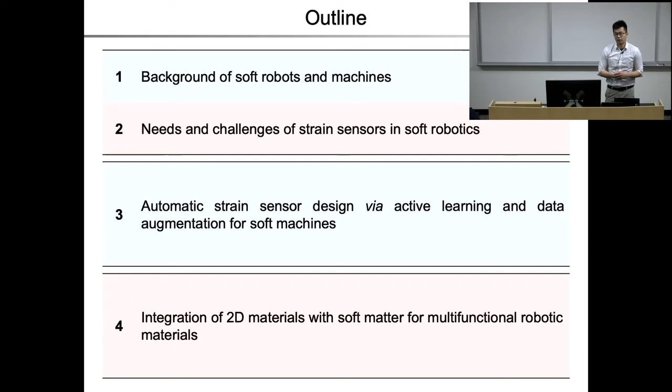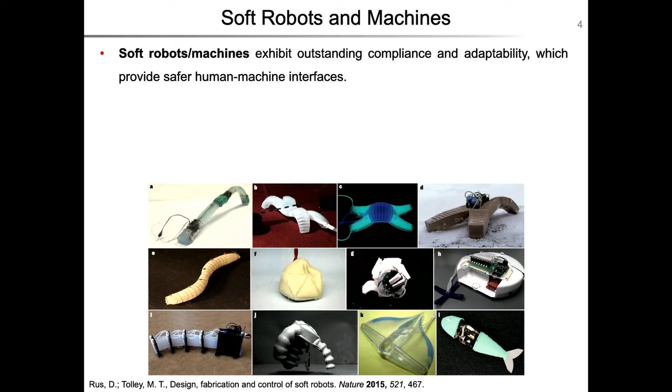All right, so first of all, let's do the background of the soft robot and soft machine introductions. So soft robot and soft machine, as you can see in the figure over here, they are fabricated by using soft matters. So unlike the traditional robot, which has a rigid body or rigid links, they are using elastomers, like silicone elastomer, or some people use hydrogel or polymer or paper, to create these origami structures or these soft, octopus-like soft robots.

Okay, and then because the material they are using is intrinsically soft, they have outstanding compliance and adaptability. So when you control these soft robots, theoretically they have infinite degrees of freedom of deformation. So they give us a lot of advantage compared with conventional rigid robots. And because they are using this kind of soft matter as their body, the soft robot features lightweight and lower fabrication cost.

Also, because of the lightweight, you can use less power to drive this robot to actuate and do the task, so it's relatively power efficient. And those materials are easy to get access to. Even a high school student in my lab can fabricate a soft robot and soft machines.

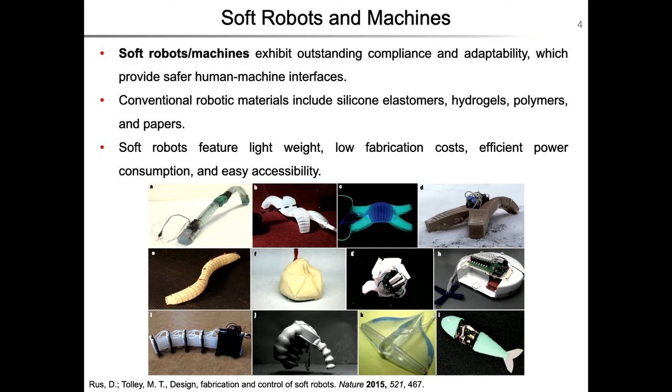One of the focus areas in the soft robotic field right now is to give the soft robot environmental perception or self perception. The way people normally do this is to embed sensors into or onto the soft robotic bodies. As you can see, there are several examples here, trying to embed sensors to help the robot understand itself, understand the environment, and understand the objects it's dealing with.

For example, if we embed strain sensors into the soft robot, the strain sensor can provide kinematic estimations indicating the deformation degree of the robot itself, helping us achieve feedback control. Once you know how much they deform, you can control, for example, your pressure or engine power to drive your robot to a certain location with high precision. That's a strain sensor — it gives you kinematic perceptions.

Pressure sensors give us information about contact with objects. For example, if the robot is grabbing something heavy or light, like a ball, a pressure sensor lets you tell the surface texture, weight, roughness, and hardness of the object the soft robot is dealing with.

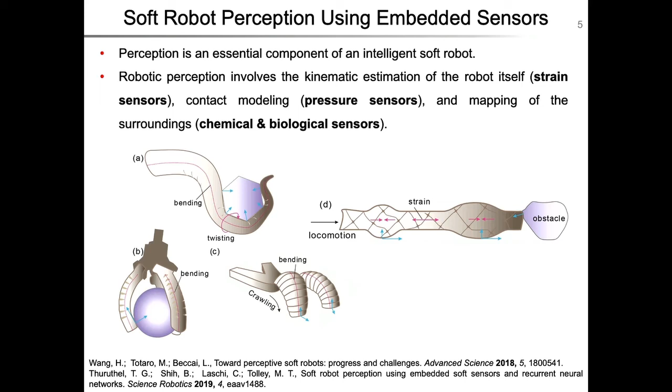The last category is chemical and biological sensors. They can be embedded or placed onto soft robots to help the robot understand the environment and the situation, helping them decide their next movements. My lab focuses a lot on making these kinds of sensors for soft robots, ranging from strain sensors to pressure sensors and chemical and biological sensors.

There's an intrinsic difficulty: most materials developed for sensors are designed for rigid substrates. Because of the feature of soft robots having infinite degrees of freedom in deformation, we need to bring those rigid materials from rigid surfaces to flexible substrates or even stretchable devices, in order to integrate sensors well with soft robotic bodies.

Today I'm going to show you how we develop stretchable sensors, especially strain sensors, moving from rigid devices to stretchable devices, and how we can utilize them as wearable electronics or to make smart soft robots.

As I mentioned, we're going to focus on the soft strain sensor today. Basically, soft strain sensors give us real-time kinematic estimations to help the user achieve closed-loop feedback control. Compared with the traditional way, like setting up a camera to see the robot or person move within certain coordinates, the soft strain sensor has the advantage that you don't require heavy equipment.

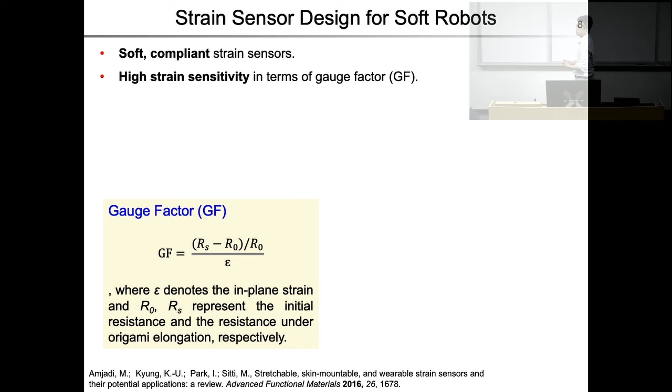Let me annotate it here. So it's a relative resistance change over the strain. You want this gauge factor as high as possible, so that it can reduce your noise ratio and allow your computer to recognize the movement precisely and in real time.

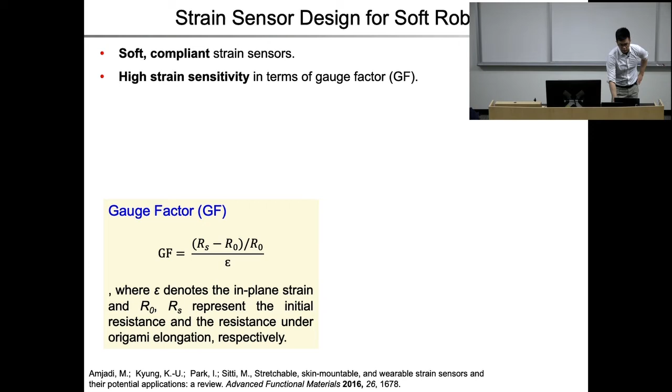The next challenge is that we want the strain sensor's working window to be tunable. For example, if I'm a humanoid soft robot, I want to monitor the strain change of my shoulders, my elbow, and also my fingers. The strain change of my fingers and my shoulder are different, so the strain sensors required for each will need to have different working windows.

The shoulder is probably about 30% of the strain range, while the finger is about 80% of the strain range. So we need a high stretchability strain sensor for the fingers, but low stretchability for the shoulders. Both require high strain sensitivity, meaning they need high gauge factors. The design logic for the sensor on the fingers and the design logic for the sensor on the shoulder will be very different. So we want our strain sensor design to be versatile and tunable to fit the strain range of whichever location of the robot you want to monitor.

The next thing is that there are several challenging sensing regions in the literature. In the figure on the right, we summarize some of the literature, and there are two kinds of strain sensors. One is the capacitive type. Although they are very stable, they normally have really low gauge factors, because of their sensing mechanism intrinsics. So we are not focusing on capacitive type sensors—we are focusing on resistive type strain sensors.

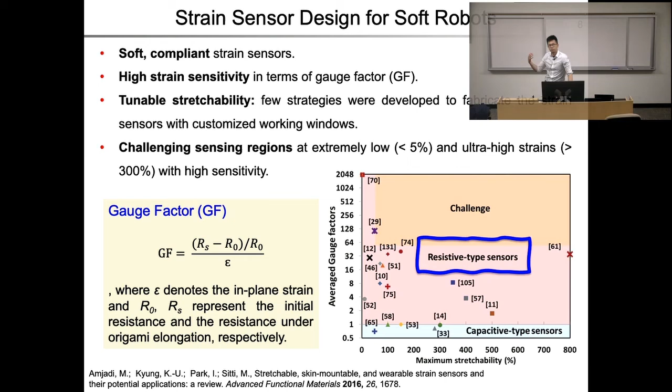And not to mention, there's no model that can predict the recipe for low strain regions and the recipe for high strain regions at the same time. So today, that is the challenge we are going to deal with.

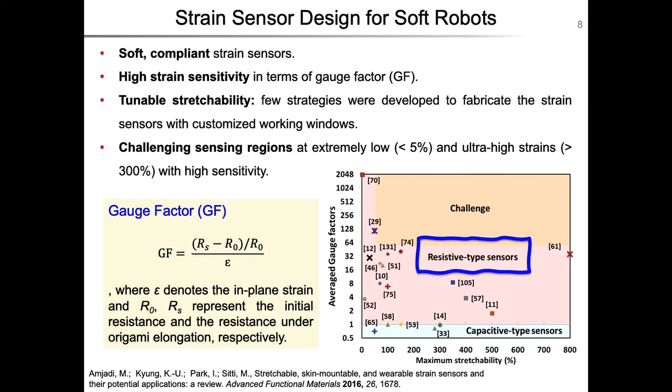If we look at the mechanism of the resistive type strain sensor, it's based on one active layer, which is conductive. When you stretch this active layer from 0% to 60%, if you look at it under the microscope, you can see cracks start to form on the active layer. When you have more cracks, it means your electron pathway gets cut off more, so your resistance goes up along with the strain. But this crack propagation behavior is very random.

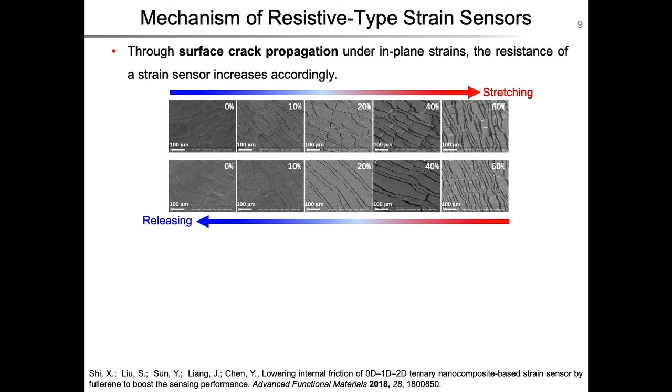There's no good simulation model that can really predict these random behaviors. So it's very difficult to use traditional methods, like molecular dynamics or FEA, to mimic these random crack propagations. This crack propagation is also very sensitive to the components you use to synthesize or fabricate these active layers.

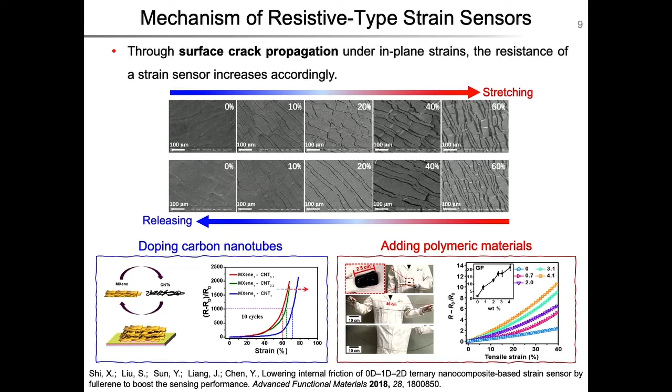For example, if we add more carbon nanotubes mixed with a 2D material, you can see that adding the CNT pushes the stretchability up. But if you add polymer into that, it changes the resistance curve in a different direction. So in the literature, people normally fix the rest of the materials and only change two materials, because that's what humans are good at optimizing—only two parameters. But if we want to optimize multiple parameters together, that's out of the three-dimensional range our brains can handle. So we want to utilize machine intelligence to help us optimize the recipe for fabricating these active layers for the strain sensors.

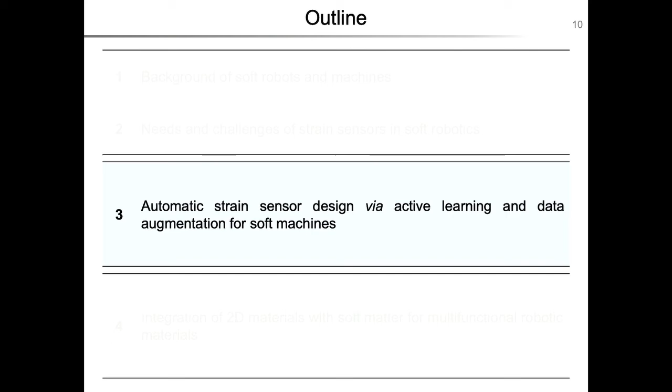Today we're going to show you our recent work using active learning and data augmentation to help us prepare a model and design the fabrication recipe for strain sensors.

First of all is the composition. You can change the composition of these strain sensing layers. For example, we choose several representative nanomaterials: MXene nanosheets, single wall carbon nanotube, and polymer polyvinyl alcohol, PVA. These three materials are what people normally use, and then combine them together to make the strain sensors.

Another degree of freedom we want to study is the thickness of these strain sensor layers. And another degree of freedom we can play with is the morphology.

We can create different morphologies, like planar morphology, periodical wrinkles, or isotropic crumple morphology onto these strain sensor layers. Let me grab a white paper to show you what periodical wrinkles or isotropic crumples mean.

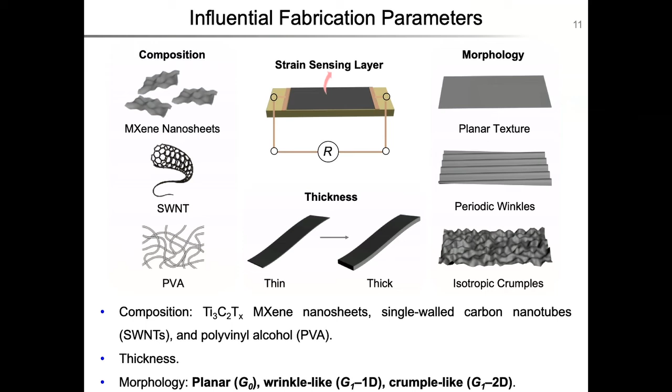So the planar morphology is just like that - we fabricate a sensor, and this is their strain sensing layer morphology. This is called planar texture.

Periodical wrinkle is when we fold it at the microscale. We have these periodical wrinkles, and then we stretch perpendicular to the wrinkles - that's the periodical wrinkle.

Isotropic crumple is when we crumple the strain sensing layer and then put it back on the substrate. So you have this random crumple structure on top of the strain sensing layer. All three of these morphologies have been shown in the literature to have effects on the performance of strain sensors. Let's take a look.

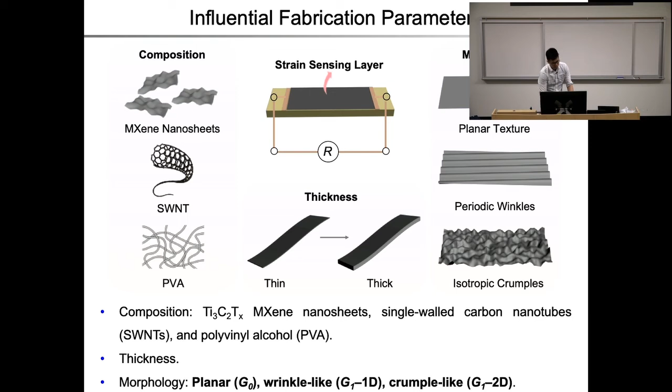Similarly, by changing the thickness, you'll change the stretchability as well. So composition and thickness are influential parameters, and morphology as well - by changing the morphology you'll be able to change the stretchability of your sensors a lot. So we did some preliminary data.

We recognize composition, thickness, and morphology are three influential parameters we can play with in the design space of strain sensors. If we do a simple map, there are about 4 dimensions in this design space. We have 3 components - if we fix 2 of them, we fix the third one. So there are 2 degrees of freedom in the composition, 1 degree of freedom in thickness, 1 degree of freedom in morphology. In total, we have 4 degrees of freedom in our design space.

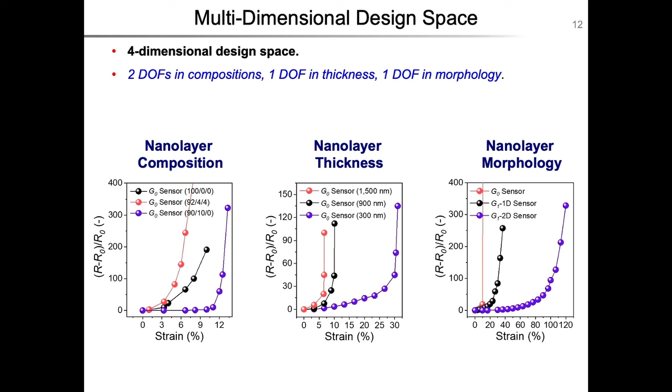So that's already out of my brain - I believe you guys probably can optimize it by designing experiments, but what we're trying to do is ask the help of machine learning to help us optimize this 4 degrees of freedom design space.

We're trying to make a prediction model that can do a 2-way design task. One of these tasks is that if I have my composition, my thickness, my morphology that I want in my recipe, I can directly get it without doing experiments - the model will predict the performance for me, and that performance will be the same as the experiment I would do.

So that will save your time, and I can watch Netflix just running this model without doing experiments, right? So this is the first of the design tasks - it will be really useful to save some experimental time.

For example, if I have a robot like these fish robots that we're going to show you later, and I know the strain change of the fish robot fin is about 5%, I can feed back to the model and say, hey, I want a strain sensor that can sense the 5% strain change. Can you give me a recipe?

The model should find a feasible fabrication recipe for me. I emphasize feasible because we want a model that won't give you a crazy recipe, like fabricate this sensor at 2,000 degrees C, something you could never finish. We want to train a model that can recommend a feasible fabrication recipe that you, or my student, can actually do to create strain sensors for specific soft machines. That's our goal.

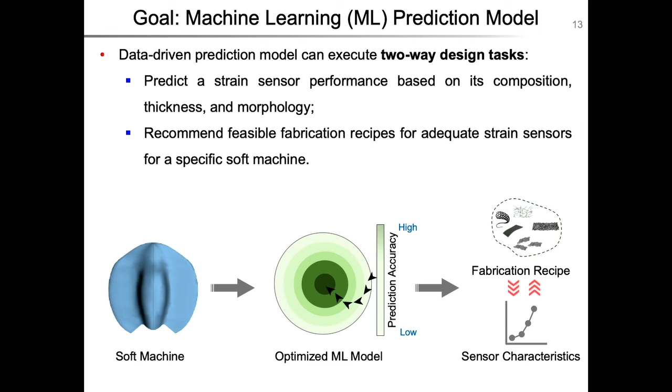Machine learning is a versatile tool, but most of the time it's good for data-rich systems. So data is a problem. How do we get enough data for machine learning to make accurate predictions?

A lot of the literature uses literature data — I collect some data from your lab, some from another lab, and build a model together for my strain sensors.

There are three major problems with using literature data. First, strain sensors don't have a standardized fabrication protocol. You can come up with your own protocol, I can come up with mine, even two of my own students will come up with different protocols. So the data quality will be low, since the way you fabricate will be slightly different.

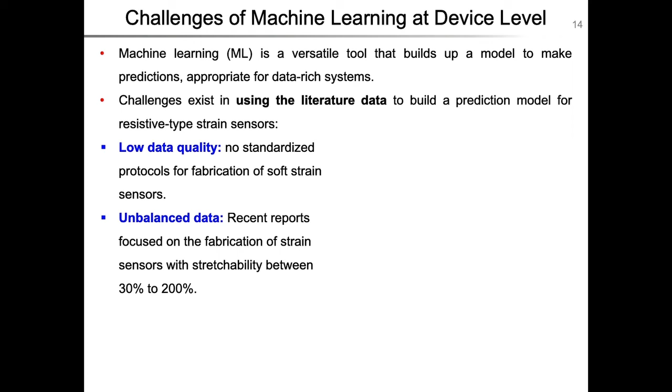Also, if we collect data from the literature, we'll always get unbalanced data, because most reported stretchability falls only between 30% and 200%. But as I mentioned, the challenging regions are less than 5% and above 300% — that's the soft robot region we'll deal with in the future, like very large stretchability or very small vibrations. Since literature data only focuses on 30% to 200%, that limits the view of your machine learning models.

Most papers only report good data. Even my own papers, if I'm not doing machine learning, I don't report my failed data. So when I collect data, I only have the good data, not the bad data needed for correlations. Those are the problems with using literature data to build prediction models.

So how do we deal with these problems in my lab? I really like these figures — today's AI and machine learning use a lot of real data collected either by external video or by sensors. But in the future, these authors believe real data will be used as a base to create synthetic data, and both will be used together hybridly to train the model and optimize accuracy. We're going to use the same approach.

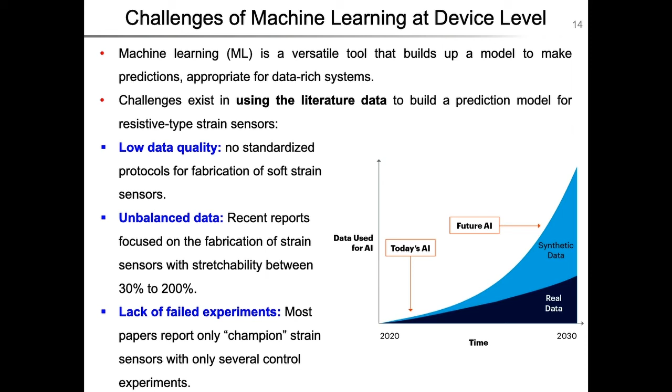We're going to run experiments and then synthesize virtual data based on those experiments to feed into our machine learning model — using both synthetic data and real experimental data to train the models, without using any literature data. I can generalize the steps of building these models into three steps.

The first step is boundary definition. We use a classic SVM classifier to block away some regions in the 4-dimensional design space. The gray region here represents areas we're experimentally unable to finish, so we need to block those away for the model — otherwise the model might recommend a recipe that students, me, or my postdoc could never actually execute to get that strain sensor. So we need to block those away.

And the next thing we're going to do is active learning. So we do it stage-wise to collect the representative data in the 4-dimensional design space. This approach will help us minimize the amount of experiment we need to do, and then navigate the entire 4-degree design space.

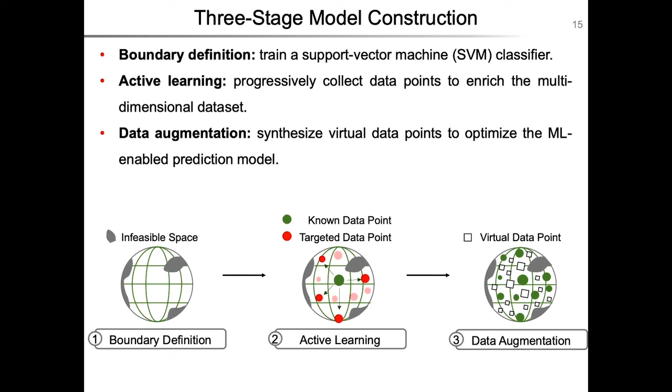The last one I'm going to do, as I mentioned, is to synthesize the virtual data based on the experiment data we collect, and then optimize the accuracies of these prediction models. So those are the 3 steps, and let's do it step by step.

The first step is to do boundary definition. We're trying to block off some portions of the design space so we can focus only on the feasible recipes or feasible compositions.

So when we're doing the experiment for the strain sensor, what we're trying to do first is filter the materials. We filter polymer, 2D material, and CNT onto membranes.

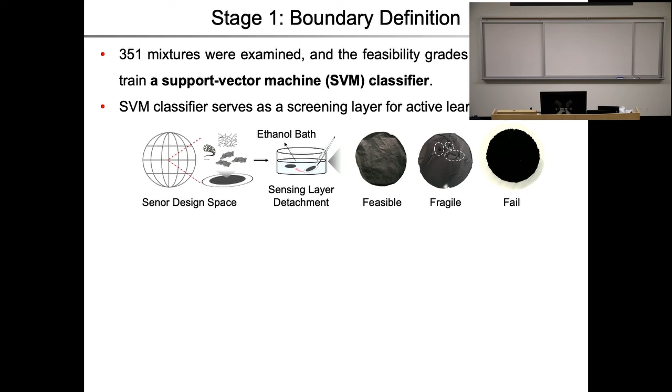Then we'll peel off the membranes from the filtration membranes, and take the active layer film onto a stretchable substrate. But during this peel-off process, some are easy to peel off, some crack, and some just stay on the membrane and won't come off. So we categorize them as feasible, fragile, and fail.

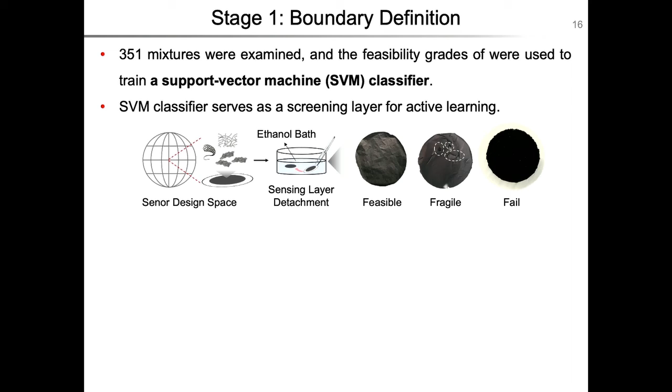And then we do 351 mixtures across the composition design space. We found that on the left-hand side and right-hand side here, the black region represents the failed compositions.

Those compositions—for example, 80 of the PVA, 10 of the CNT, and the other 10 your 2D material—these data will fail. You'll encounter failed experiments where they just stick onto the substrate.

So we do the 351 tests and find out this is my region. The green region is the one I'll focus on—those are the regions where I can peel off the active layer from the membrane.

Then we use SVM and turn these discrete data into a heat map, and the feasibility becomes the possibility of detachment. We set the threshold around 0.8 probability of detaching the film, and we'll only focus on the green regions in those compositions.

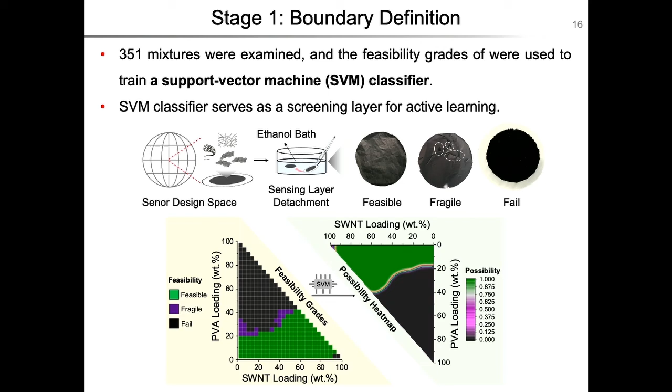So that's the first stage, to define the boundary of our design space. For the second step, it's called active learning, so we are starting to do the experiments.

First of all, we do some random experiments with a random fabrication recipe. So we fabricate 10 in the very beginning with a random recipe, and then we measure their sensing performance.

Then we take out several points of the sensing performance profile and combine them as one data point for each recipe. So we have 10 recipes, and we have 10 data points here.

Then we fit into the decision tree and ANN models, and they come out with 6 decision programs. These 6 decision programs start to calculate across the entire design space.

They try to find the data points they are unfamiliar with—ones far away from the green dots, which are the experiments we've already done. The red dots are the ones with the highest variance among the 6 decision programs, and are far away from the already known data points.

Then they locate and feed back to us, and we let them pass through the SVM to see whether they're in the green region where we're able to do experiments. Then we do the experiment again and turn those red dots into green dots.

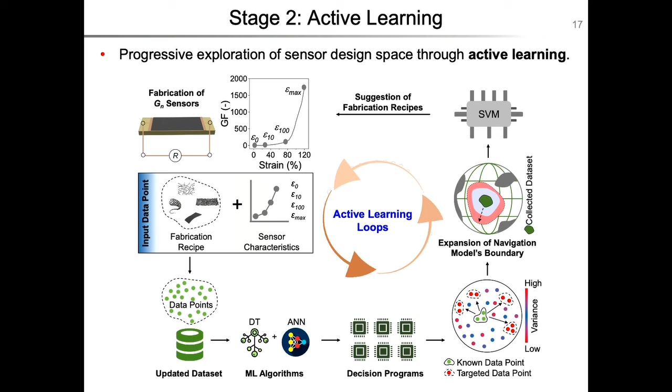125 of them, you can see the model kind of equally suggests us to do the experiment to understand the design space for each morphology. We do 12 rounds basically, and 12 rounds takes about 2 months to finish the design space navigation.

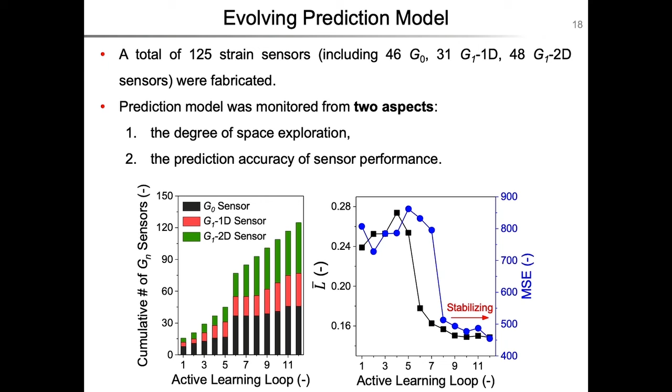Okay, so the next thing is that, as I mentioned, those are the real data - 125 are my real data, and I want to save my students' time and save on sensors. Making sensors requires money, so I want to reduce the cost of building up this model.

So after that, we will be able to increase our data points from 125 to about 10K. These 10K of data will also decrease the overfitting problems in the machine learning model. After that, we utilize a genetic algorithm selection to select the decision programs that give us the best prediction performance, and that will be our champion model for our strain sensor design.

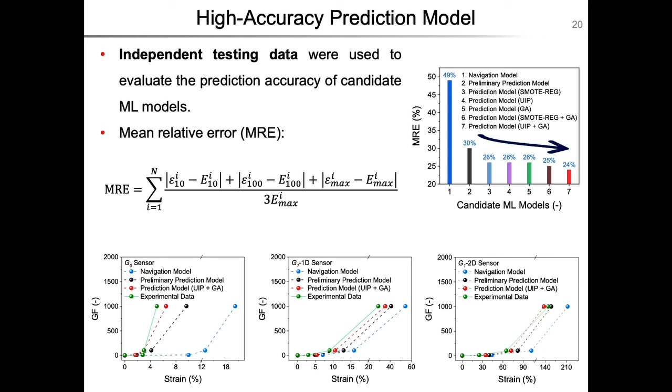It is starting to become really close to the experimental data, so we are satisfied to utilize them as the champion models. So now we finally have the model. We can utilize them to design the strain sensor for soft robots.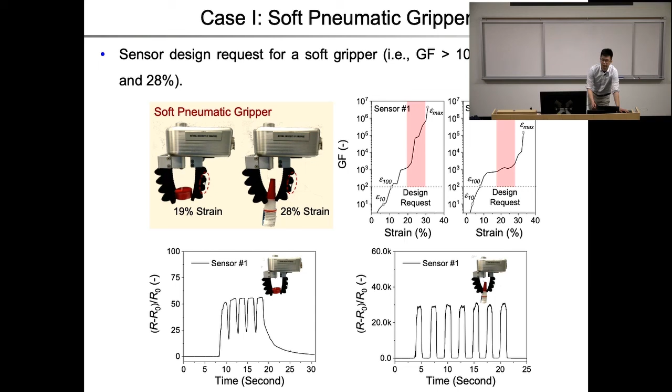The first case I'm going to show is that we utilize this model to design the sensor for a soft gripper. We're trying to measure the strain of the soft gripper on the outer edge of its fingers. We found that when grabbing one bottle, it's 19% strain, and when grabbing another kind of bottle, it's 28% strain.

So we fit in those design requests: I want a gauge factor, which is the sensitivity, larger than 100, and a stretchability between 19% and 28%.

Normally when trying to satisfy this design request, my student would need to do a lot of experiments, trial and error, to see what morphology and composition is best for these soft robotic grippers. But now we just put these requests into the model, and it comes out with a recipe for us. We fabricate it based on the recipe, and it shows a very sharp change.

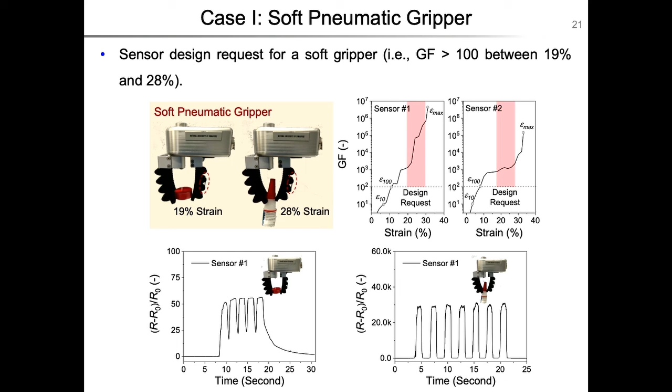Sensor number 1 is one recipe, sensor number 2 is another recipe, and sensor number 1 gives us pretty good sensitivity within the 18%, 19%, and 28% strain range. So we can utilize that, attaching it to a soft gripper to help identify its pneumatic actuations.

Another example: we're collaborating with an underwater soft robotics lab. They have soft robotic fish, and they want us to design the sensors for their fin.

Their fin strain change is only about 1%, and as I mentioned earlier, 1% is within the challenging region of strain sensor design. A conventional commercial strain sensor is normally fine at about 10% strain change, but below 5% you start to get a lot of noise, and your signal to noise ratio becomes low.

So we fit those requests into the model, and it came out with 2 recipes within 1% strain — the red highlighted bar is the 1% region. We chose sensor 2 because its gauge factor slope is huge there.

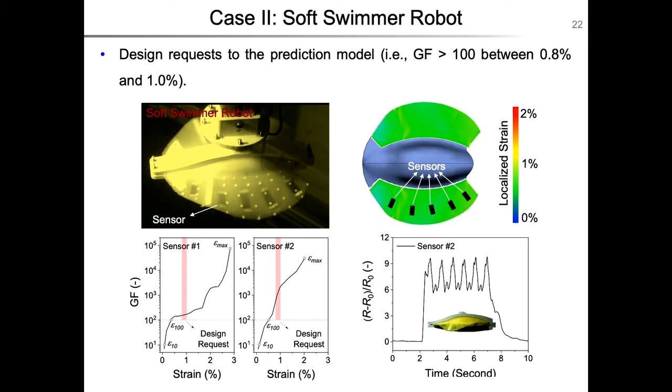We used our recipe and put it back onto the fish. As you can see from the figure on the right, we placed 5 sensors on the fin to monitor its flapping behavior in the water. We have some videos to show you.

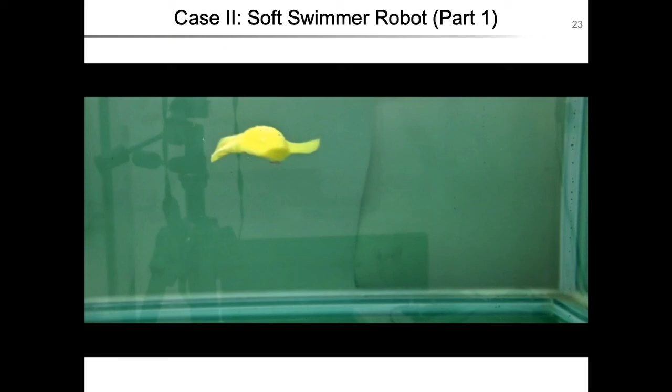This is the soft swimming robot, and you can see the left fin has 5 sensors attached. Because our sensors are soft and compliant enough, they still allow the swimming robot to perform navigation routes without disturbing its swimming patterns.

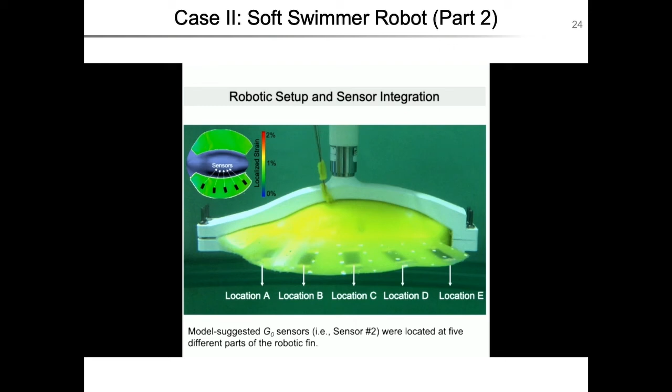We can also monitor the fin's flapping behaviors in real time with the 5 sensors integrated. When they flap, peaks start to show up, and if you count the number of peaks, it exactly matches the number of flaps categorized from the videos.

We tried 3 different flapping frequencies, and the strain sensors were able to detect and report the same frequencies that we set in the soft swimming robots.

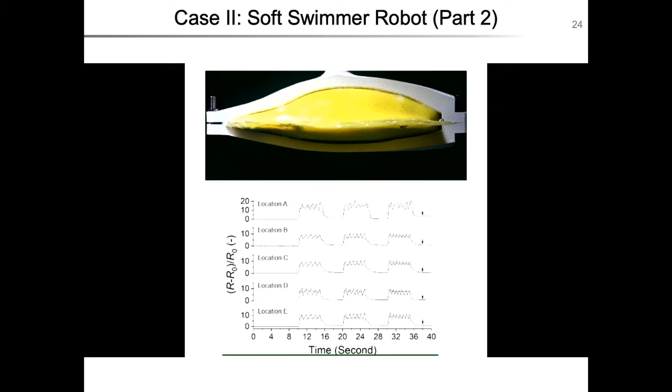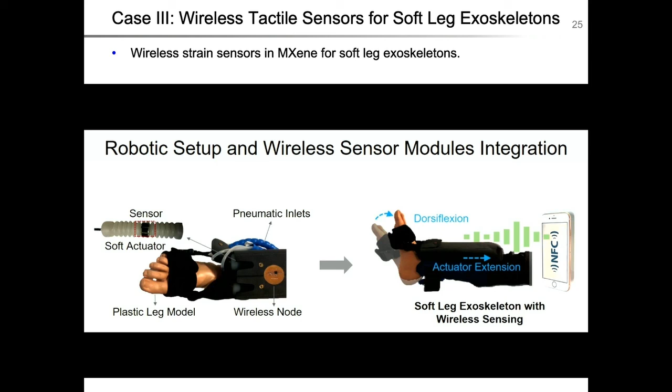We also tried connecting our sensors with wireless chips, using them to wirelessly monitor soft exoskeletons for rehabilitation analysis. When we put our sensor into these soft exoskeletons, we were able to tell how much strain was applied to them.

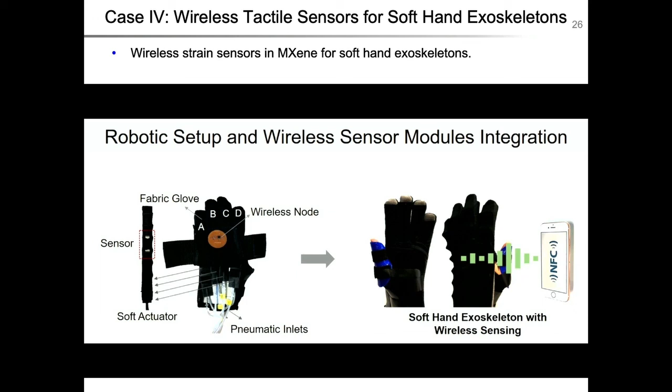Similarly, we also tried hand exoskeletons. We can connect them to wireless chips, receiving data wirelessly, so we're able to tell what kind of objects we are grabbing, because the strain of your soft exoskeleton hand will have a different strain change. That's more of the application part.

The other thing we can do is we collected 125 sensors. One drawback people always feel about machine learning is that it's a black box—no one knows why machine learning makes those decisions. A lot of people are trying to drive machine learning toward explainable machine learning, so that's what we're trying to do as well.

We do this by statistical analysis to understand the decision-making logic of the machine learning models. First we list out all 125 sensors and look at their working windows. We found the model can interestingly predict some very crazy stretchability up to 350%.

Some sensors have really small stretchability, about 0.3% only. If we used literature data to train these models, it would be hard to get those kinds of data, because the literature only fits data within 30 to 200%. But using our own data, the model is able to push us to the limits of the design space, giving sensors within those challenging regions. So 0.3% and 350% are both well located in regions that were challenging in the literature.

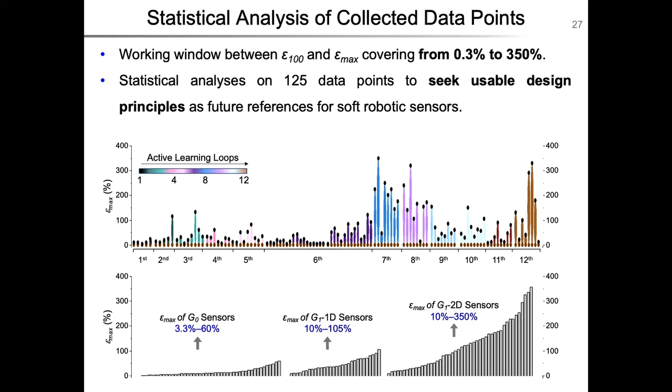We continued the data analysis to see whether there are usable design principles. First we did Spearman rank correlation analysis to find out whether there's a strong monotonic correlation between the recipes and the performance. Based on three figures, we found an interesting correlation in G0, G1-1D, and G1-2D sensors.

In the G0 sensors, we have CNT ratio, PVA ratio, and thickness as degrees of freedom. Which one should we change to move the sensor's performance the most? We found that thickness is the most effective approach if you want to change G0 performance. Changing CNT ratio and PVA, i.e. changing the composition, does not have strong effects.

Similarly, using data analysis we found that for G1-1D sensors, changing CNT and changing thickness have equally influential effects. For G1-2D, instead of thickness, changing the composition is more influential—it's the most influential factor.

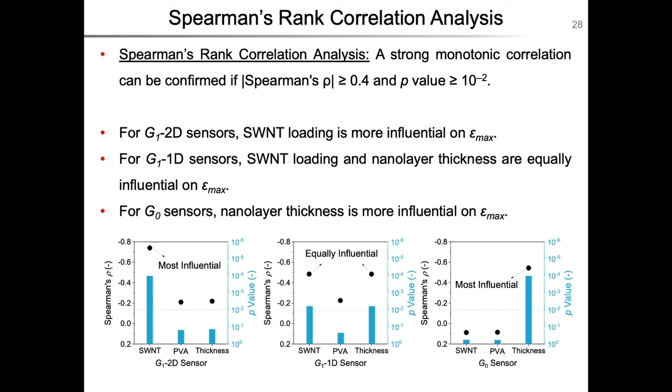We also did another kind of data analysis called SHAP, a game-theoretic approach to explain the output of machine learning models. I won't go into detail, but the SHAP analysis results are very similar: for G0, thickness is the dominant effect controlling sensor performance, and G1-1D has equally influential parameters.

Because these two data analyses give us those conclusions, we take them as data-driven design principles. All right, to finish this talk, since we're about at time.

So let me summarize. We developed a method that is hybrid, using wet lab experiments and machine intelligence, to construct high accuracy prediction models. These can do two-way design tasks: predicting performance based on a recipe, or coming up with a recipe based on the performance you want.

We developed a three-stage machine learning framework, including an SVM classifier, an active learning loop, and data augmentation. We're able to do this inverse design task for strain sensors for different kinds of soft machines or soft robots that can be utilized in water or worn on the body.

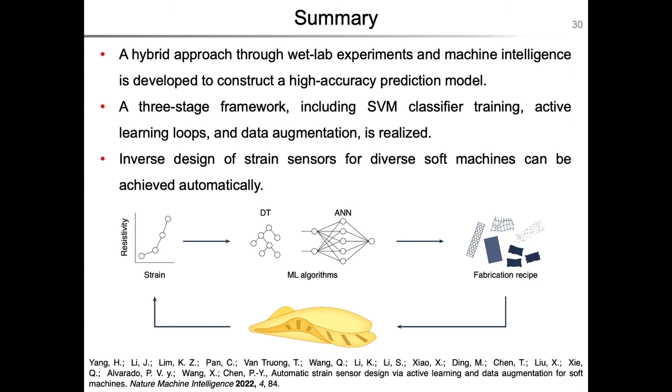This is work we recently published in Nature Machine Intelligence, and they also wrote a highlight review for it. So I think that's today's talk.

I don't think we have time to go through the last stage, but let me show you some nice videos. My lab is trying to bring 2D materials into soft matter, to create new soft robotic materials that have intrinsic advantages compared with silicone elastomers or hydrogels. Let me show some quick videos.

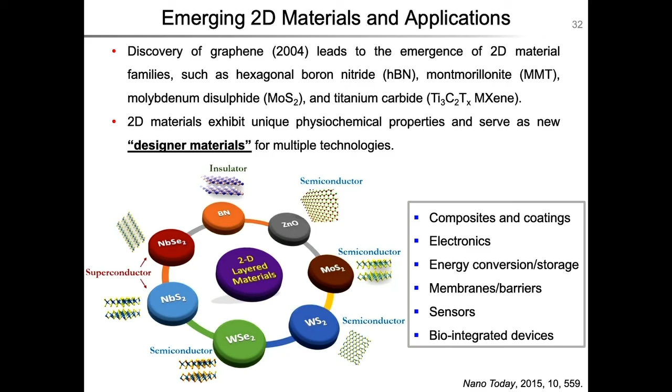First, we try putting some nano clay into the elastomer, creating a crumpled structure on the surface—like giving the soft robots a fire-retardant skin. This fire-retardant skin has a wrinkle-like structure. When you stretch it, the fire-retardant skin will not break apart; it just actuates along with the elastomer.

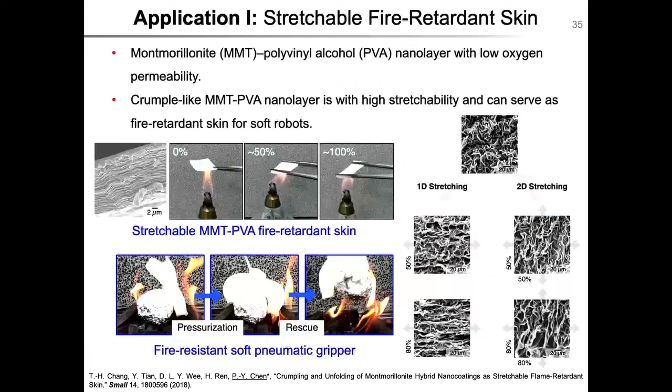So we can make soft robots fire retardant, so they can grab objects from fires. We can also put it onto a glove—you can see those are nitrile gloves in the lab.

If you— what's that?

One sec. Yeah, maybe I can play it like this.

If you put a nitrile glove to the flame, they'll burn immediately. But if you have fire retardant coatings onto the glove, even if you make your glove larger, they can come in contact with the ethanol flame without generating a flame. So that is safe for people dealing with ethanol burners.

By using a similar method, we are able to make stretchable supercapacitors that can be utilized on robots. You can see this is the battery we are making, and we can stretch these batteries and still have really good capacity and good recharging capabilities.

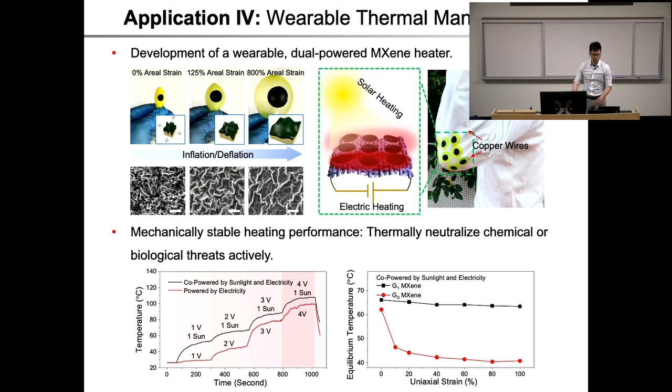We also can make stretchable heaters that can be wired onto clothing, and they can also do heat management for the clothing.

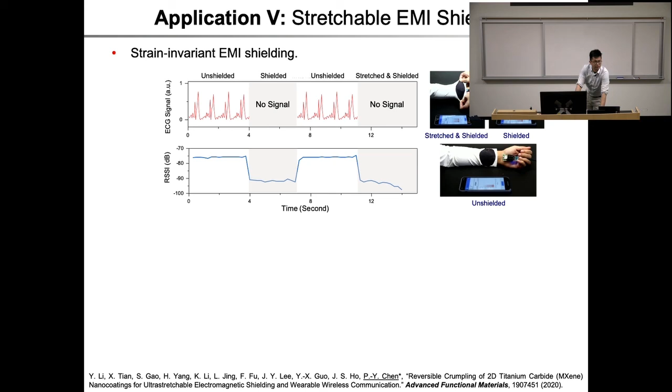We also make stretchable EMI shielding layers. We use phones a lot, and there's an EMI wave around it. Although there's no report saying this EMI wave is harmful, people still have concerns. So we are trying to make this stretchable EMI shielding that can be embedded into fabrics to prevent antenna waves from getting into your body.

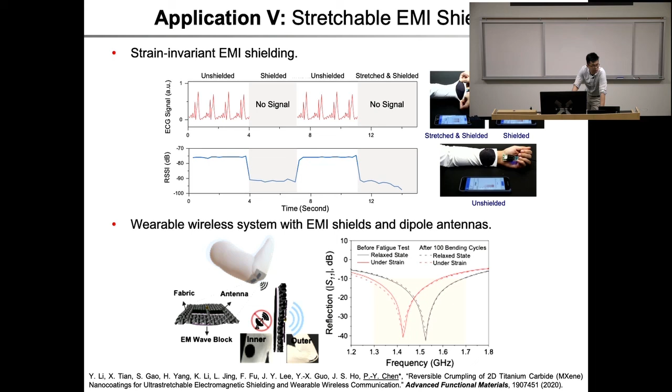We also use a similar way to make wearable materials that can be utilized as protection for robots. We also work with the hospital to make a stretchable pressure sensor for transoral surgical procedures.

When they touch a little bit of your tissue, they will respond with a strong signal back, so the surgeon will know they need to move away from that region to avoid unnecessary scratching. So that is the pressure sensor we will also work with.

I think that will be everything I want to present to you. Thank you for the invitation, and thank you for your time attending this seminar. And thank you for the introduction as well.